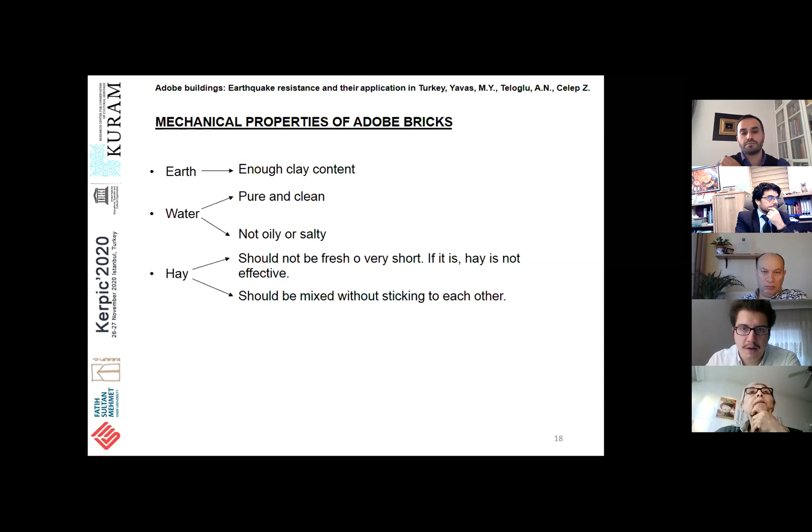Kerpiç tuğlaların mekanik özelliklerine gelecek olursak, kerpiçin içinde toprak, su ve saman bulunmaktadır. Toprağın yeterli kil miktarının olması gerekmektedir. Suyun ise temiz, tuzsuz ve yağsız olması gerekmektedir. Samansa ne çok taze ne de çok kısa olmalıdır. En etkili olduğu an kısa ve üzerinden belli bir zaman geçmiş olan samandır. Aynı zamanda samanın ayrılarak karışımın içine koyulması gerekmektedir.

Su miktarı arttırılırsa çok iyi bir kıvam elde edilir kerpiç harcında, fakat bu istenmeyen çatlaklara sebebiyet verir. Çok az su miktarı ise kerpiç harcının istenilen şekle getirilmemesine sebep olur.

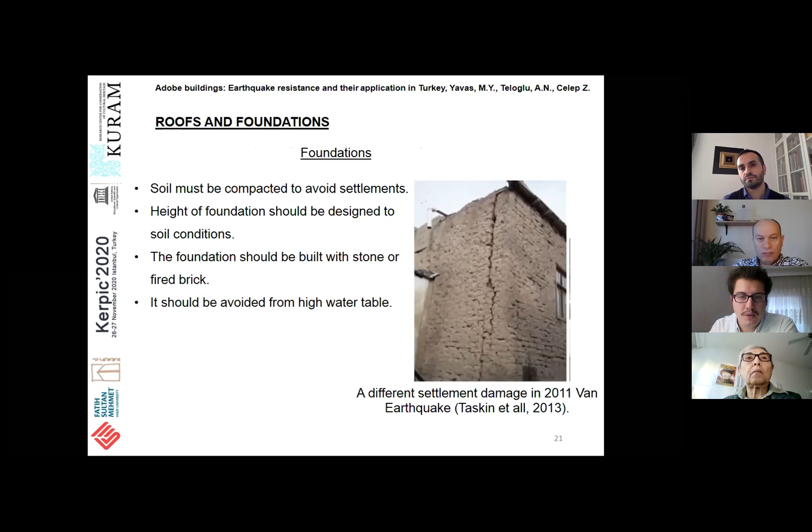Kerpiç binalardaki temellere bakacak olursak, oturmalardan kaçınılmalıdır kerpiç binalarda. O sebeple sıkılaştırılmış zemin kullanılmalıdır. Kerpiç binalardaki temel yüksekliği zemin koşuluna bağlı olarak seçilmelidir. Temel taştan veya pişirilmiş tuğladan yapılmalıdır. Yüksek su seviyesinden kaçınılmalıdır. Çatılara bakacak olursak, çatılarda uniform yani düzgün yayılı bir yük dağılımı olmalıdır. Çatı malzemesi ahşap, makas veyahut betonarme döşeme olmalıdır. Türkiye'deki en büyük deprem hasarları çatılardaki hasarlardan meydana gelir. Bunun sebebi de daha önce bahsettiğimiz gibi çatılarda kullanılan çok büyük kütükler ve aynı zamanda çatının binayla bağlantısının olmamasından kaynaklı hasarlar meydana gelir.

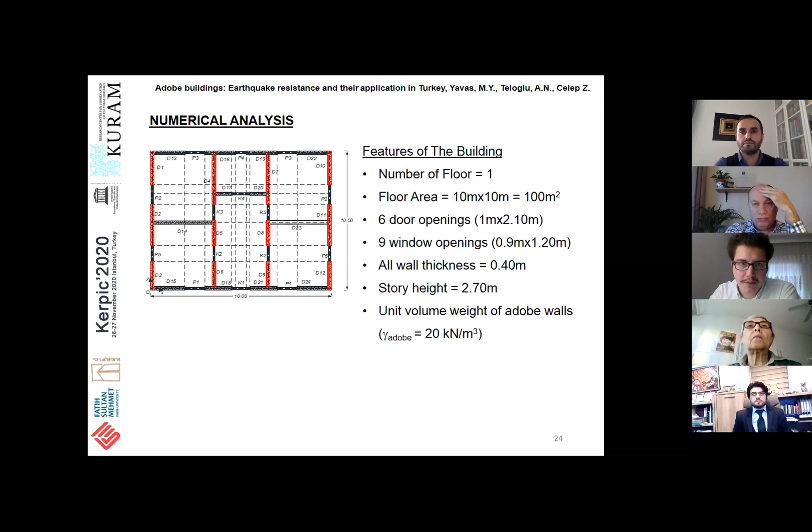Kerpiç bir binada basit bir deprem güvenliğini incelemek istersek, simetrik 10 metreye 10 metre, toplam taban alanı 100 metrekare olan tek katlı bir bina kabul ettik. Bu binada 6 tane kapı açıklığı, 9 tane de pencere açıklığı bulunsun. Boyutları görüldüğü gibidir. Bütün duvar kalınlıkları 0.40 metre alındı. Kat yüksekliği ise 2.70 metre. Kerpiç duvarlarının birim hacim ağırlığı da 20 kN/m3 olarak alındı. Burada tabii bu değerlerin hepsi yönetmeliklerdeki ve çalışmalardan alınmış yaklaşık değerlerdir.

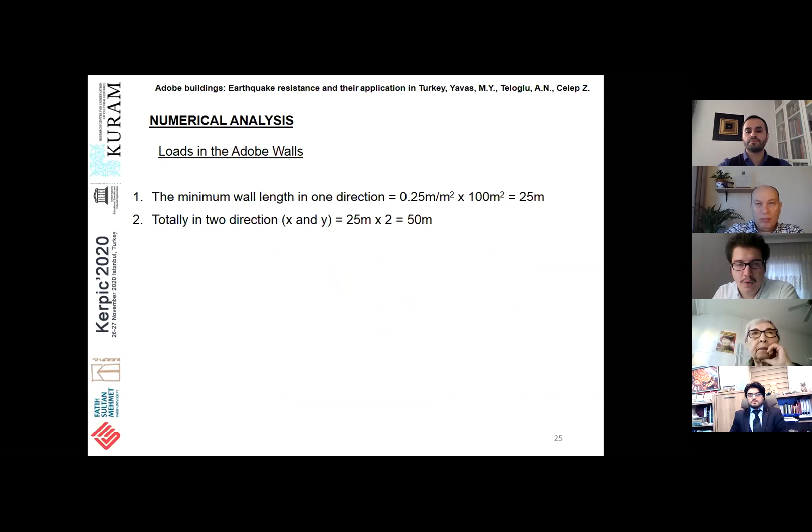1998 deprem yönetmeliğinde şöyle bir madde var: pencere ve kapı açıklıkları haricinde tek bir yöndeki duvar uzunluğunun bina taban alanına bölünmesinin minimum değeri 0.25 metre bölü metrekare olmalıdır. Bu kural kullanılarak tek bir yöndeki duvar uzunlukları, binanın taban alanına çarpıldığı zaman 25 metre olarak bulunur. İki yöndeki hem X hem de Y'deki toplam duvar uzunluğu ise 50 metre olarak bulunur. Tabii buna pencere ve kapı açıklığı dahil değildir. Toplam duvar alanları ise duvar kalınlığı ile çarparak 20 metrekare olarak bulunabilir. Kapı ve pencere açıklıkları ise sayıları ve uzunlukları çarpılarak bulunabilir, o da 21.60 metre olarak bulunmuştur. Duvar uzunlukları ve açıklık, kapı ve pencere açıklıklarının uzunlukları toplanırsa toplamda 71.60 metre bir uzunluk elde edildi.

Sonuç olarak duvarlardaki düşey yükler şu şekilde hesaplanabilir: toplam uzunluklar çarpı kat yüksekliği eksi kapılardaki kapı sayısı çarpı kapının alanı eksi pencere sayısı çarpı pencerenin alanı, çarpı 0.40 metre duvar kalınlığı, çarpı 20 kN/m3 kerpiçin birim hacim ağırlığı. Toplamda duvarlardaki yükler 1368 kN olarak bulunmuştur.

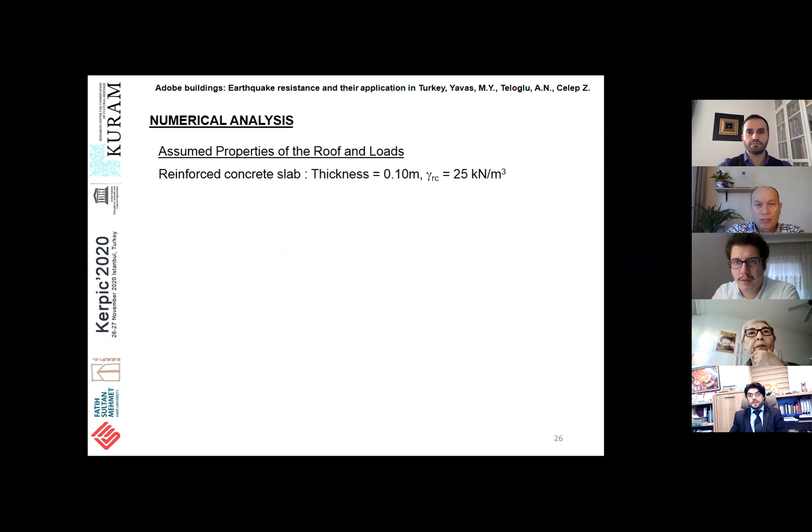Biz bu binaya aynı zamanda bir çatı yapmak istediğimiz zaman betonarme plaktan bir çatı düşündük. Bu betonarme plağın kalınlığı 0.10 metre ve birim hacim ağırlığı 25 kN/m3 olsun diye düşündük. Termal izolasyonu sağlaması için bir kil tabaka olabilir, onun da kalınlığı 0.15 metre ve birim hacim ağırlığı 20 kN/m3 olarak düşünüldü. Kaplama yükü bir çatıda düşünüldü ve bu da 1 kN/m2 olarak alındı. Bina planıyla çatı planı aynı düşünülerek çatının alanı da 100 metrekare olarak alındı. Sonucunda çatıdaki yükler de 0.10 metre çarpı 25 betonarme plaktan gelen, 0.15 çarpı 20 kil tabakadan gelen ve 1 kN/m2'de ek yük olarak düşünüldü. Bu çatı alanı ile çarpıldığı zaman çatı yükü 650 kN olarak bulunmuş oldu. Toplam bina yükü ise duvarların yüküyle çatı yükünün toplamından 2018 kN olarak alındı.

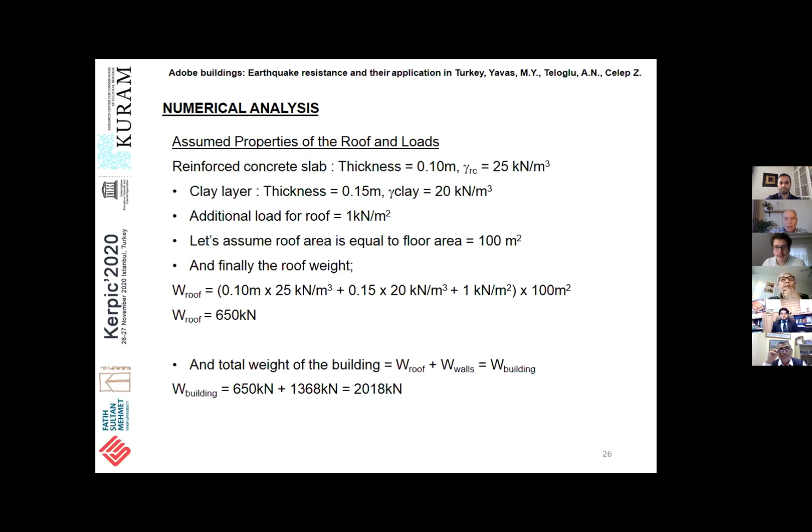Binaya gelen deprem kuvvetini bulmak istersek Türkiye Bina Deprem Yönetmeliğinde verilen spektrum kullanıldı. Binamız hem kerpiç hem de tek katlı olduğu için çok küçük bir periyoda sahip. O sebeple Türkiye Bina Deprem Yönetmeliğinde spektrumda birinci bölgededir, o da 0.4 SDS ile SDS arasında bir ivme değerine sahiptir. Eğer SDS 1.22 kabul edilirse bu bölgede yatay elastik ivme değeri de G kadardır. Deprem yükü azaltma katsayısı seçilmemiştir ve R eşittir 1 olarak hesaba devam edilmiştir. Binaya gelen yatay deprem kuvveti, bina yükü çarpı ivme bölü deprem yükü azaltma katsayısından bina ağırlığına eşit çıkmıştır, o da 2018 kilonewton'dur. Tabii bu deprem yükünden ve düşey yükten dolayı oluşan gerilmelere bakalım.

Güvenle taşıyabilecek binadaki basınç gerilmesi 1 ve kayma gerilmesi 0.15 N/mm² alınmıştır. Kayma gerilmesi çekme gerilmesiyle birbirine eşit olarak alınmıştır binada, yaklaşık olarak tabii ki. Düşey yüklerden dolayı oluşan gerilmeler şu şekilde bulunur: binaya gelen düşey yük olan bina ağırlığı bölü duvarların alanı, iki yöndeki duvarlar alınmıştır. Burada 0.40 metre bina duvar kalınlığı çarpı 25 çarpı 2'de duvarların uzunluğu şeklinde, buradan 0.10 N/mm² bulunmuştur. Bunun birden küçük olduğu görülmektedir. Düşey yüklere karşı dayanıklı diyebiliriz binamız için.

So yeah, we have high-rise masonry buildings in Istanbul and in some other parts of Turkey, as well as many mosques and minarets. So it's a common type of structure in Turkey. The problem is we have a large variety of materials, sometimes good, sometimes bad. Sometimes non-structural bricks are used as structural members, which end up with collapse or heavy damages during earthquakes, which of course makes people approach this kind of construction more carefully.

So until 2018, we had only the allowable stress design method in Turkish seismic design codes. When we modified the code, the 2007 code, ultimate strength design was one of the main revisions on the masonry part. Based on UDSEP, the planning of the state about earthquake resistance overall the country, we were recommended to follow European codes basically - Eurocode 6 and Eurocode 8, masonry and seismic design parts of Eurocodes, were the basis of the revisions. Of course, these codes will be revised in future, so probably we will adapt to these changes as well.

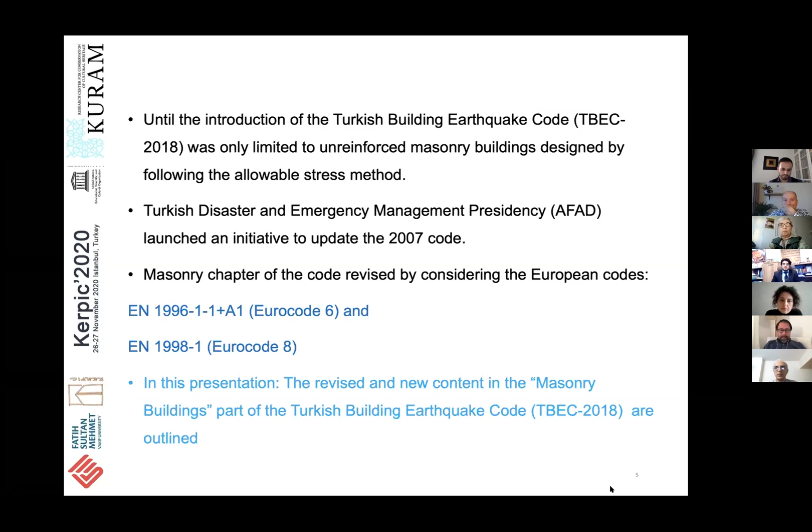So what's new in Turkish Building Earthquake Code 2018? Basically, as I mentioned, we are now using the ultimate strength method, which is a big change for masonry design. Equally important, there are new masonry types on top of unreinforced masonry, which was the only covered masonry type in the previous code. Now we have confined masonry, reinforced masonry, and also reinforced panel buildings. While confined masonry and reinforced masonry are common in many parts of the world, reinforced panel AAC buildings - this is lightweight concrete buildings - is, as far as I know, the first time codified, and that's codified in Turkey through research with a combination of different universities and relevant associations. I will show some of those, and I believe I have many slides, but probably I will only be able to introduce these different types of new masonry systems to the audience because of lack of time, and because I could not make a good organization of the presentation - sorry for that.

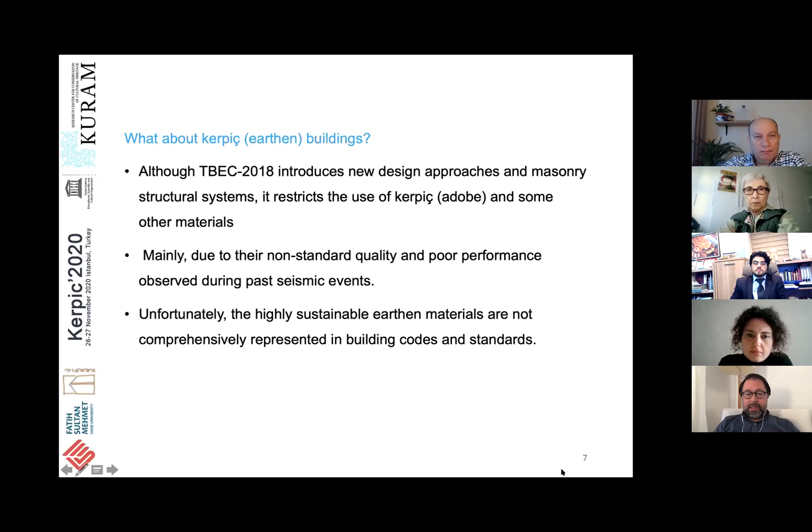So unfortunately, as I mentioned, although there are new design approaches and new masonry types, the code had to restrict use of Adobe and some other materials due to the non-standard material quality and also the workmanship and the resulting poor performance during previous earthquakes, not only in Turkey but also other countries. Of course, we have good examples too, but the non-standard quality made these kind of restrictions valid in the new code. So we hope to do more research - we have to improve, as the previous speaker mentioned, the seismic performance of earthen materials and structures so that we can somehow make them behave better during earthquakes.

Unreinforced buildings have well-known rules in the seismic design code, so I won't spend time on that. Instead, let's discuss confined masonry buildings, which are relatively new in terms of Turkish seismic design codes.

Actually, we already had such structures. The structure on the right is a kind of confined masonry. We have many of these buildings throughout, where first the walls are constructed and then the concrete members, like weak columns and weak beams or tie beams, are constructed afterwards. Now this is codified with construction and detailing rules in Turkish seismic design codes, and we call it kuşatılmış yığma in Turkish, the confined masonry.

Reinforced masonry is an even better application with higher ductility, and the code allows significantly higher buildings to be constructed using this technique.

While doing this, we were always in contact with industry, with the brick industry and others, and we asked about the possibility of producing such members. They were very willing, because masonry construction is getting less common day by day, so they needed new openings, new frontiers. They were very willing to apply these new materials in their production.

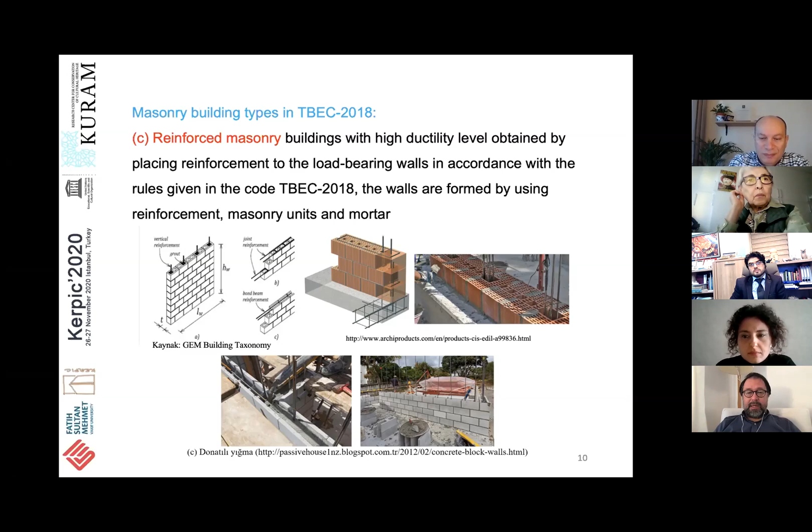This one is new, as I mentioned. While it's used all around the world, including Turkey, it was not codified before. Up to this code, the regulations about how to design and calculate these structures are now included. Basically, we have a reinforced panel like that, used either as walls or slabs.

In between the panels we have reinforcing bars, both in vertical and horizontal directions, connected to the foundation and the tie beams around the structure. You can build 2 or 3 story buildings using this technique, and since it's produced in the factory, the quality is more promising and standard.

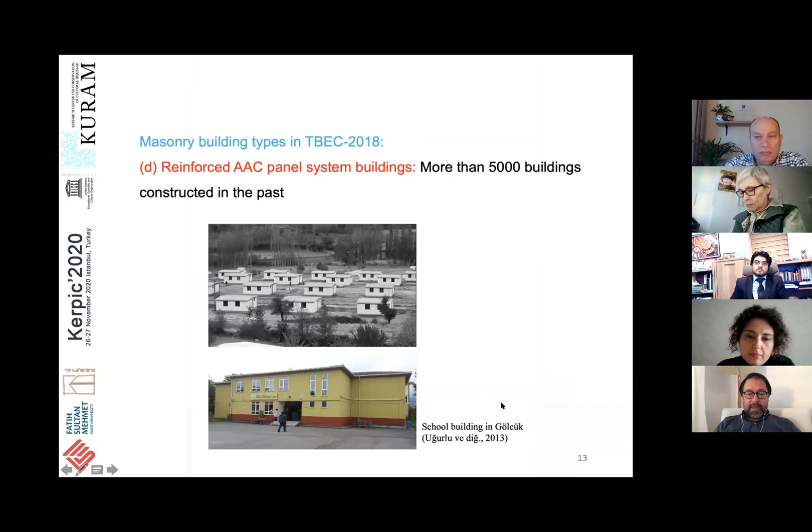More than 5,000 of these buildings have been constructed in the past, mostly right after earthquakes, built rapidly and used as shelter houses. There are also different types of buildings, one of which is in Gölcük. We examined and analyzed it in detail after the earthquake, and it performed well, as demonstrated.

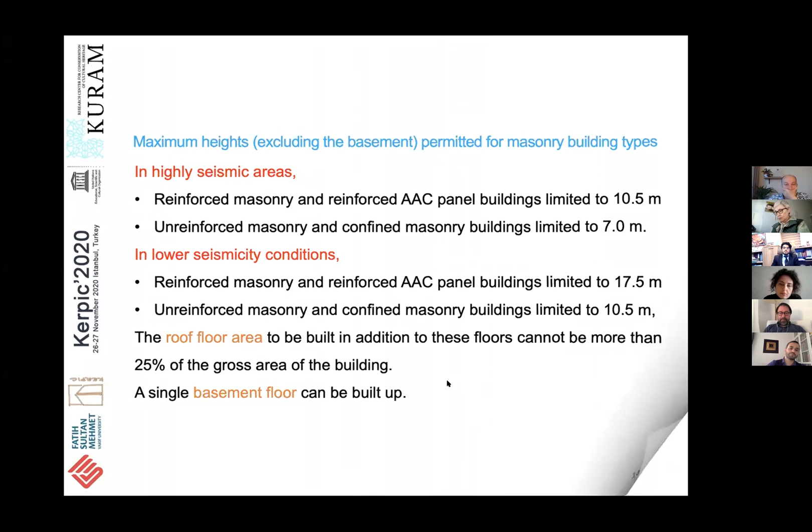Regarding different units, you can use bricks, AAC, natural stone, and artificial stones, but unfortunately some other materials are prohibited in this code. There are different definitions based on type and void ratios, which I won't spend time on, but these affect the material characteristic strengths and design strengths we must account for during design.

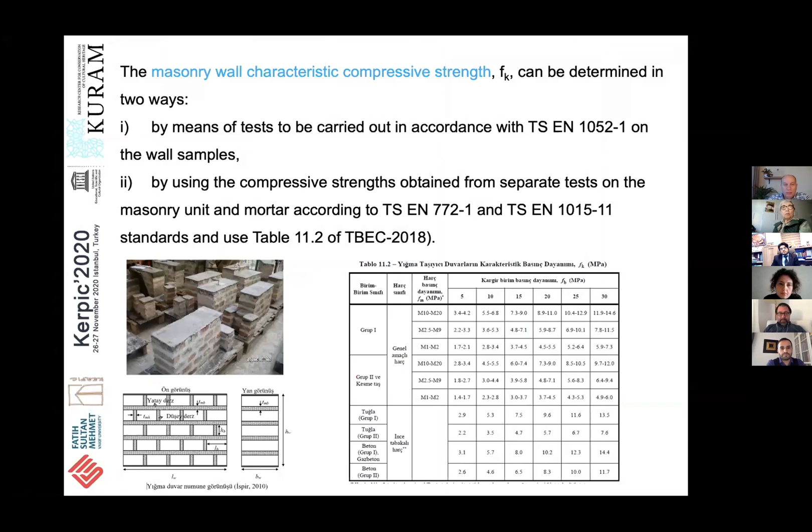I'm passing these slides - if you have any questions I'll try to answer. These show how we determine the characteristics of the materials in compression and in shear.

As the previous speaker mentioned, we now have an ultimate strength design methodology with partial material safety factors, unlike allowable stress methodology. The material factors are: for masonry blocks, it's 2; for steel bars, it's 1.15; and for factory-produced aerated concrete, it's 1.75.

These are given for the elastic modulus as well as the shear modulus of masonry. For structural analysis, we now want to require engineers to model the structure using finite element modeling and analyze it under vertical and horizontal loads rather than simple hand calculations. There was a simplified chapter, but it was removed after discussions from the code. Either finite element analysis or equivalent frame analysis methods are now allowed.

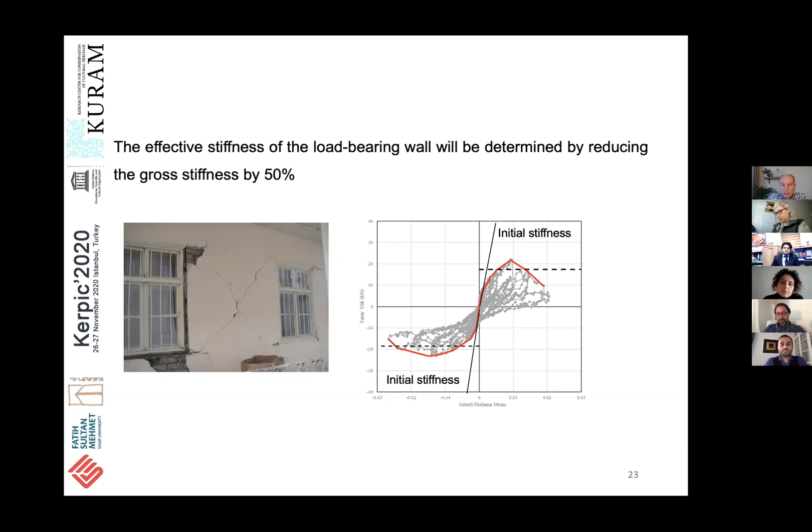Effective stiffness concepts, new for concrete structures, are being used in the 2018 code. This is valid for masonry structures as well, considering the possible cracking during earthquakes.

This is again a new concept for masonry structures. Now we consider ductility with seismic load reduction factors up to 4 for reinforced masonry and reinforced AAC panels, 3 and 2.5 for other types of masonry, as well as for shear and brittle failure mechanisms. We have an overstrength factor which should be taken into account during design.

Drift limits are broad, at 0.7% under seismic loads. Rigid diaphragms should be provided somehow, and this should be proved in the analysis, of course.

That's one of the main problems we experienced after the earthquakes. Many damages occur because of lack of sufficient diaphragm in the structure, so the structure doesn't behave like a box.

About the out-of-plane failure mechanism, no direct regulations are put in the new code, but there are some indirect limitations which will avoid out-of-plane failure mechanisms. The code allows going beyond these limits, provided additional calculations are carried out based on Eurocode.

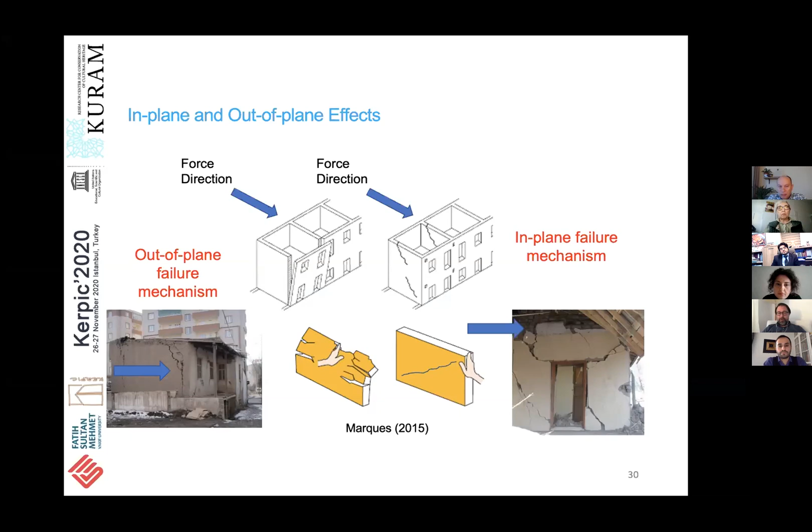But since we have only a limited number of pages, we could not go into much more detail, so I'm passing these because of the time limits.

As I said, the walls are designed like columns or shear walls, considering the reinforcement inside, using basic mechanics of reinforced concrete design. The panels are considered again like reinforced concrete walls, but they are considered separately because during earthquakes they separate from each other.

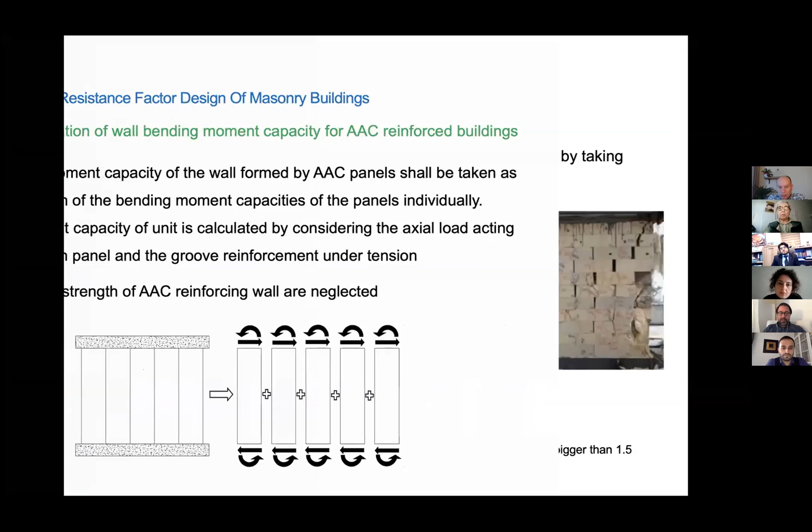Both unreinforced masonry and reinforced masonry structures are designed considering diagonal tension failures, diagonal compression failures, as well as shear slip behavior. All the equations are given, so the walls should satisfy all of those.

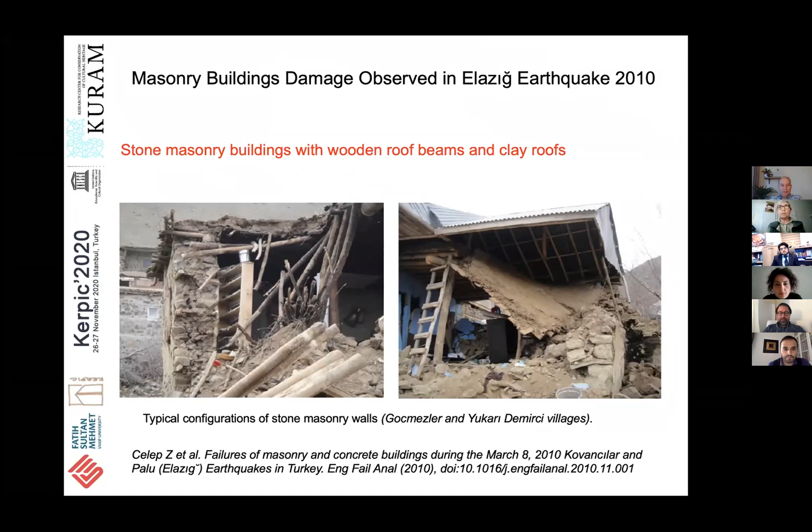With just a minute left, let me summarize some damages experienced during the earthquakes. The diaphragm is one of the main problems. Poor connections of the walls in different directions, as well as connections of different layers of the walls in the transverse direction, are among the main problems.

Out-of-plane failures are also commonly observed. You see, one story was lost here. This is in Elazığ, from the previous earthquake in 2010. One story was lost because they hadn't used proper bricks, and also the walls were poorly constructed.

In Palu, there were a lot of KERPİÇ buildings which performed extremely well, provided that these kinds of wooden tie beams were used in the structure. These are two-story structures, sometimes more, and most of them performed exceptionally well in the Palu earthquake.

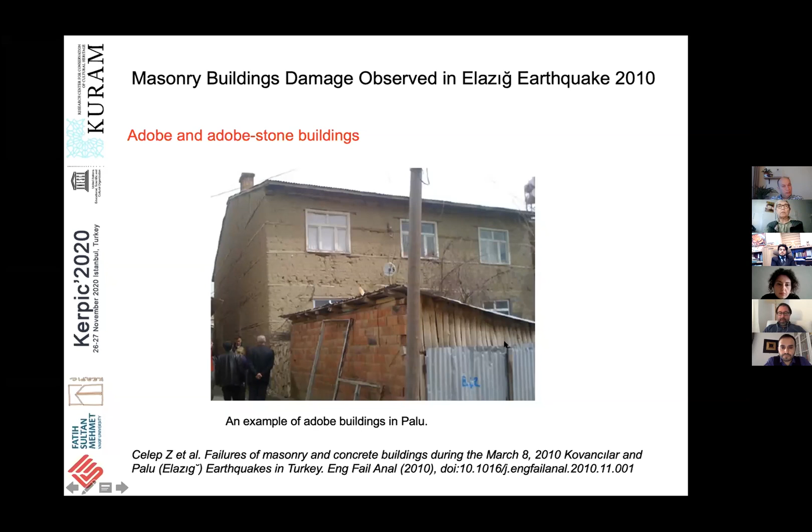I've talked about most of these, so I'm passing these slides to not take much of your time. There are many non-engineered confined masonry buildings all around Turkey.

Finally, there are new methodologies and new types of masonry construction allowed in the Turkish Seismic Design Code, and we hope to improve and apply KERPİÇ more widespread. We have to research better seismic performance of these kinds of structures.

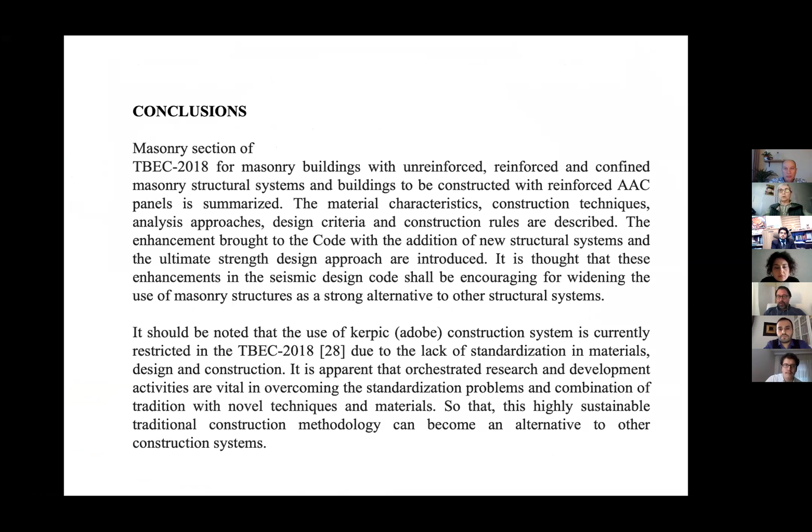My previous colleague made some suggestions. I believe they should be verified with more research, maybe more testing. With that, I complete my presentation, and thanks a lot.

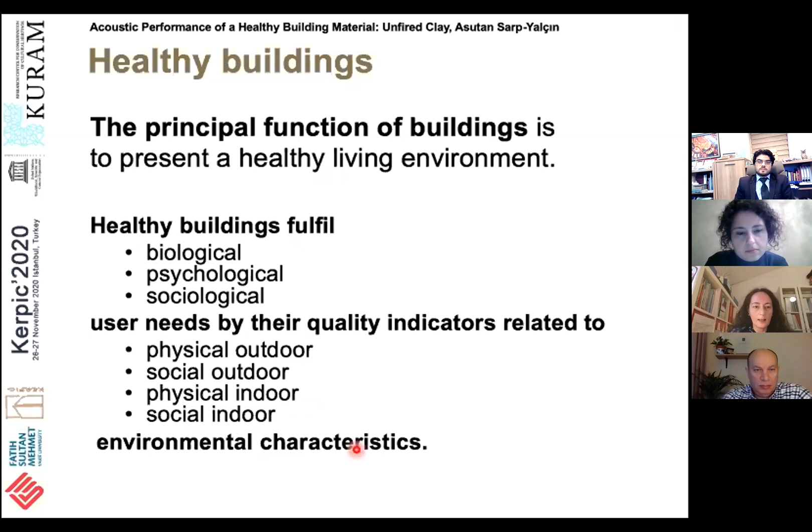The principal function of buildings is to present a healthy living environment by providing desired conditions to meet their users' needs. Healthy buildings fulfill biological, psychological, and sociological user needs through quality indicators related to physical and social, outdoor and indoor environmental characteristics. Physical indoor environmental characteristics can be classified as dimensional, formal, visual, tactile, atmospheric, and auditory characteristics.

Sound is a component of auditory characteristic, and it directly affects the performance, comfort, and health of users. Noise levels are measured in decibels in the range of 140 to 0 decibels, which are the threshold of pain and threshold of hearing. 110 decibels is shout into the ear, 90 for air traffic, 80s for road traffic, 50s for conversation, and 30s for whisper.

Noise causes a wide variety of health problems. Adverse biological effects of noise on human health are hearing loss and sleep disturbance. As a result of noise disturbance and distress, psychological effects may arise as well. In connection with these psychological effects, social influences create negativity in users' relationships with others.

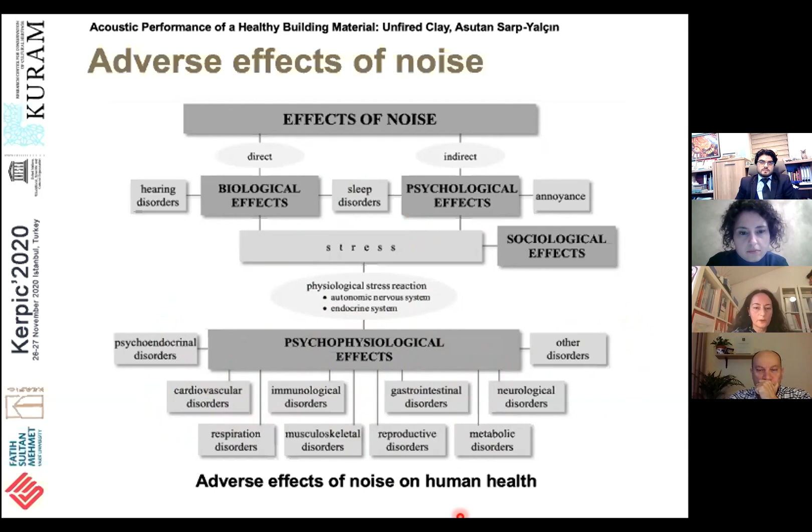So what should architects, what should we do? We should take some precautions to reduce noise levels to acceptable levels. How can we do that? The material selection of building elements is one of the most important issues to be considered during design.

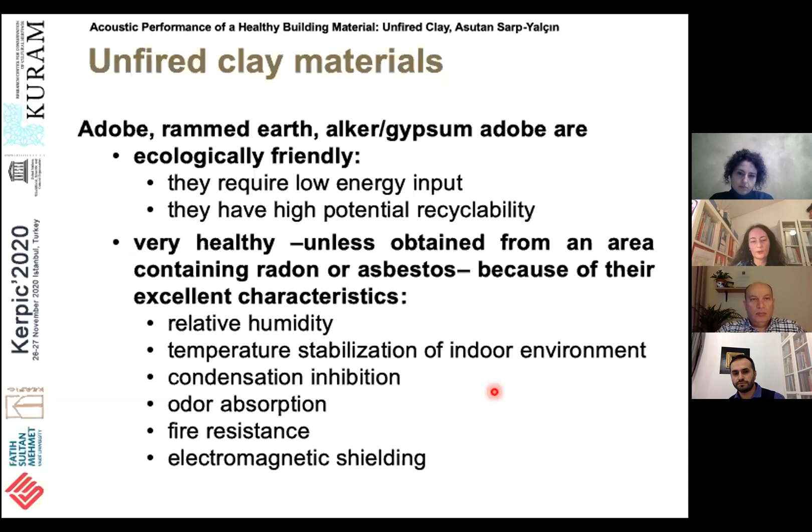Unfired clay materials such as Adobe, rammed earth, and alker are ecologically friendly because they require low energy input and have high potential recyclability. They are very healthy because they have excellent characteristics of relative humidity, temperature stabilization, condensation inhibition, odor absorption, fire resistance, and electromagnetic shielding. But what about noise reduction? The aim of my study is to reveal the acoustic performance within the scope of noise reduction and to find out whether unfired clay materials can provide a healthy indoor environment against noise.

During the evaluation of acoustic performance of unfired materials, transmission and absorption should be taken into account, as sound transmits through building elements, and after transmission it may increase due to reflection.

95% of the sound energy is transmitted by mass vibration. How? At first, sound waves vibrate building elements, then the elements act like sound sources, and they emit sound by creating vibrations on the air of the receiver room.

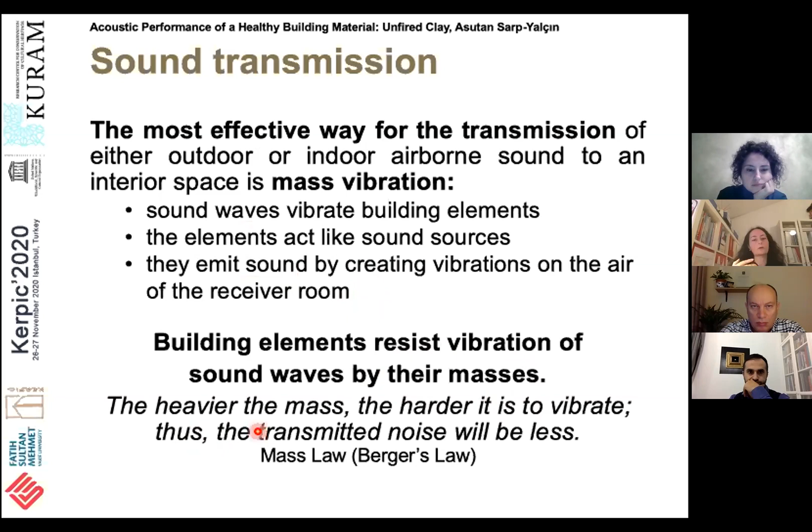Building elements resist vibration by their masses. So the heavier the mass, the harder it is to vibrate. This is called mass law, Berger's mass law.

The mass per unit area of building elements can be calculated by this equation, which multiplies mass per unit volume with the thickness of the material. Here we can see the calculated examples of the masses of external and internal walls produced from several materials.

As we can see, our unfired materials—traditional Adobe incorporated with straw, rammed earth, alker—are heavier when compared with other materials such as fired bricks, concrete, and gypsum, except for stone, of course. They're heavier because they're not hollowed, they have high density, and they are used with thick sections due to their load-bearing feature.

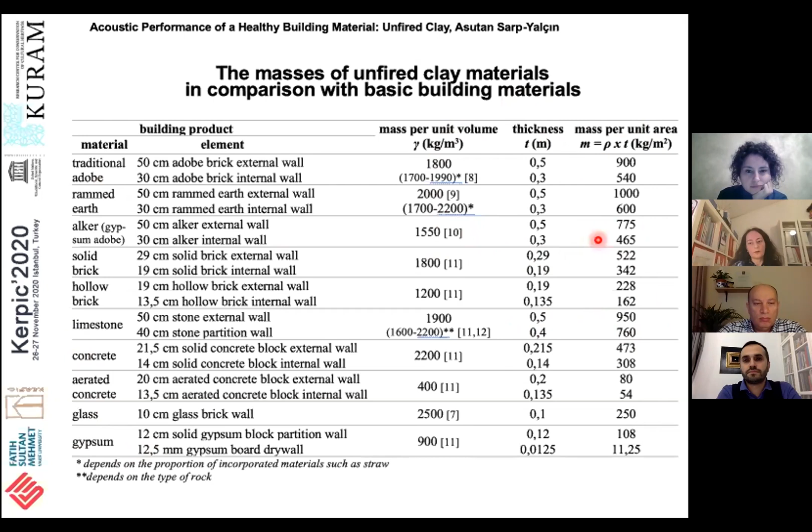Sound transmission loss determines the sound insulation property of building elements, and this STL increases with mass increase. So the heavier the partition, the less sound it transmits to the adjacent space. To reach an acceptable sound level, the increase in mass can be achieved by increasing the thickness or selecting a building material with a high density.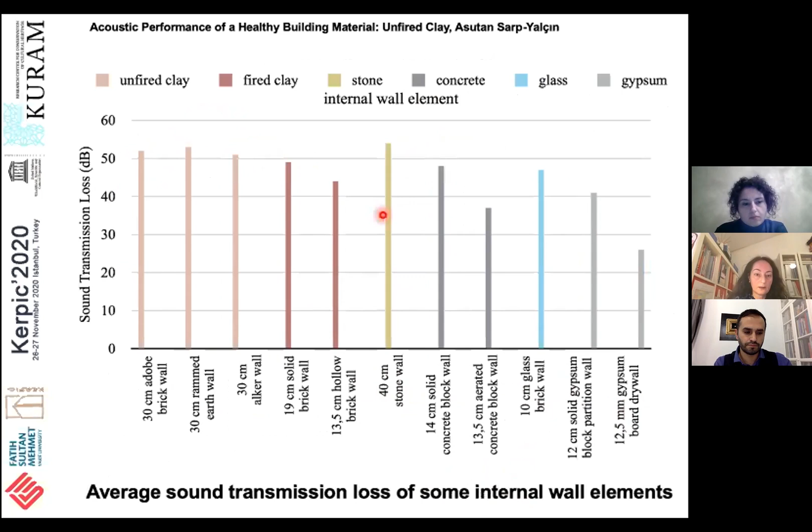Sound transmission varies with frequency, and frequency is the number of sound vibrations occurring in a unit of time. It refers to whether the sound is treble, like a child's voice or a short string sound of an instrument, or bass, like a man's voice or contrabass sound. As the frequency of the sound increases, sound transmission loss increases as well.

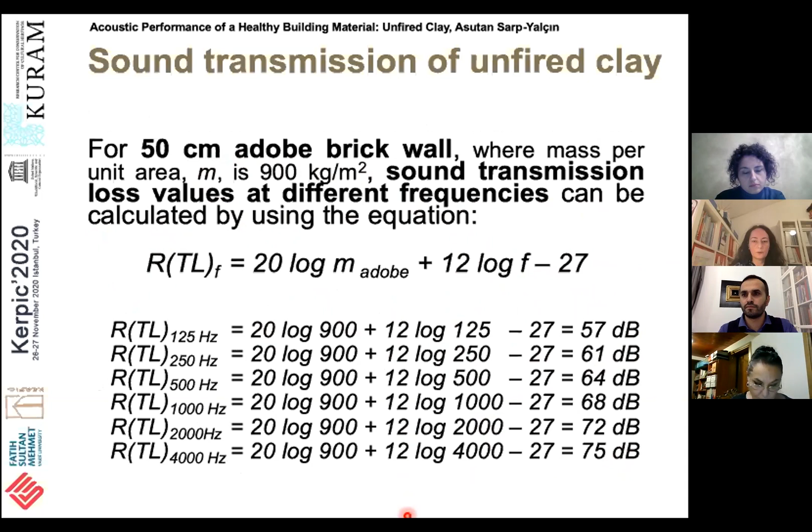We can calculate the sound transmission loss at different frequencies by this equation. For a 50 centimeter Adobe brick wall, I calculated like that, and to compare with other building materials, I applied the same calculation to the external and internal wall elements, as you can see here.

For internal wall elements, the sound transmission loss of stone is the best, followed by unfired clay products. The values of solid fired brick and concrete blocks are close to this group. Hollow brick provides low sound insulation, but still better than aerated concrete and gypsum.

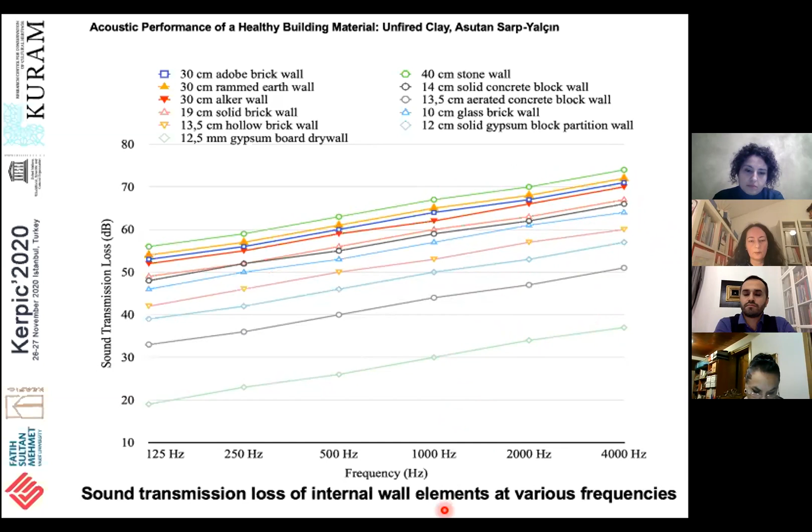At low, mid, or high frequencies, we can distinguish the difference in sound insulation of each building element, and it's easily readable from the figures that building elements have better sound insulation at high frequencies. We can see the 75 here.

I should also note that the linear graphic outcomes from calculations may not be obtained from measurement, because at certain frequencies, lower sound transmission loss than calculated can occur. The reason for this is the decrease in the section's resistance to sound energy because of resonance and coincidence frequencies. So as a precaution, we can design an extra 5 decibel higher sound transmission loss value.

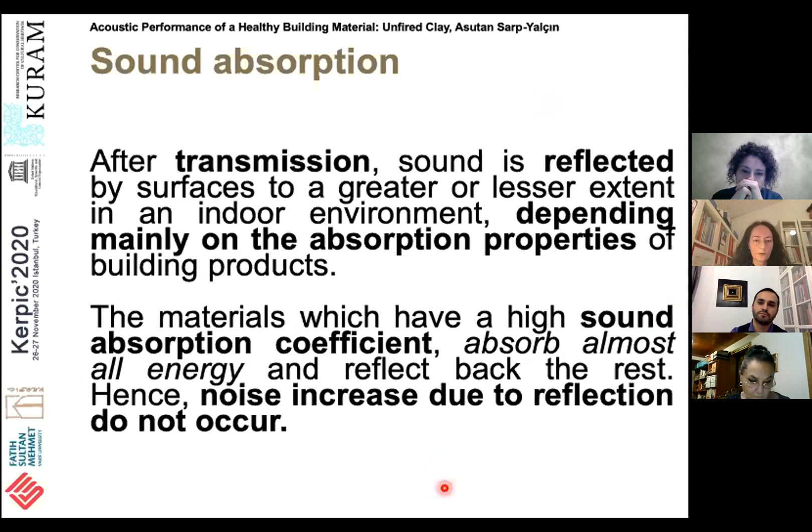When we come to sound absorption, after transmission, sound is reflected by surfaces to a greater or lesser extent. It depends mainly on the absorption properties of building products, and on the sound absorption coefficient. This absorption is related to the porosity of the materials. So light materials with fibrous or open surfaces are good absorbers, but smooth hard surfaces are highly reflective to sound.

We should take additional precautions for it, such as decreasing the density by adding low dense materials into the clay mixture, such as basaltic pumice, or placing acoustic resonators within suitable locations, or laying bricks with gaps where load-bearing feature is not required. But we shouldn't forget that direct intervention to the unfired clay wall to improve sound absorption behavior will negatively affect the sound transmission loss, in other words, insulation properties.

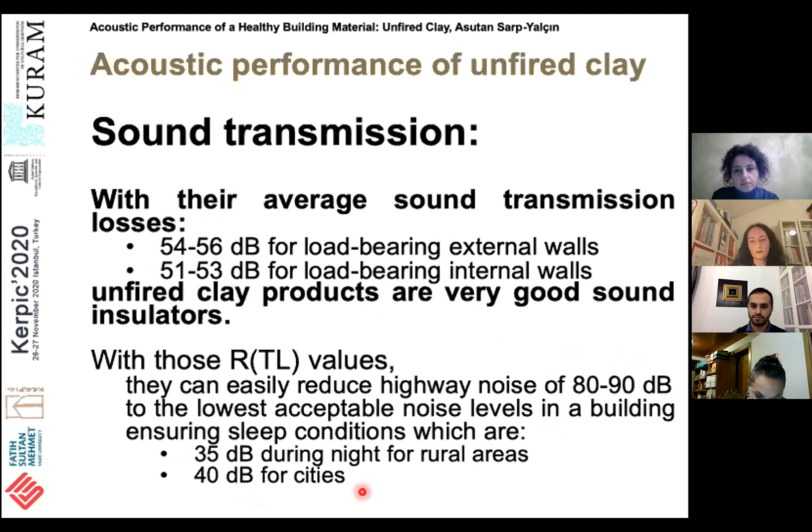For sound absorption, we should take precautions. It will be more appropriate to take precautions on the wall surface rather than its physical structure, as changing the physical structure will negatively affect the sound transmission loss properties.

So, in addition to its many excellent characteristics of environmental and health, unfired clay is a high performance material in terms of noise reduction, and the usage of this material in contemporary architecture will contribute to prevent noise-induced health problems before they occur, and fulfill the basic requirement of users to lead a healthy life in a healthy building.

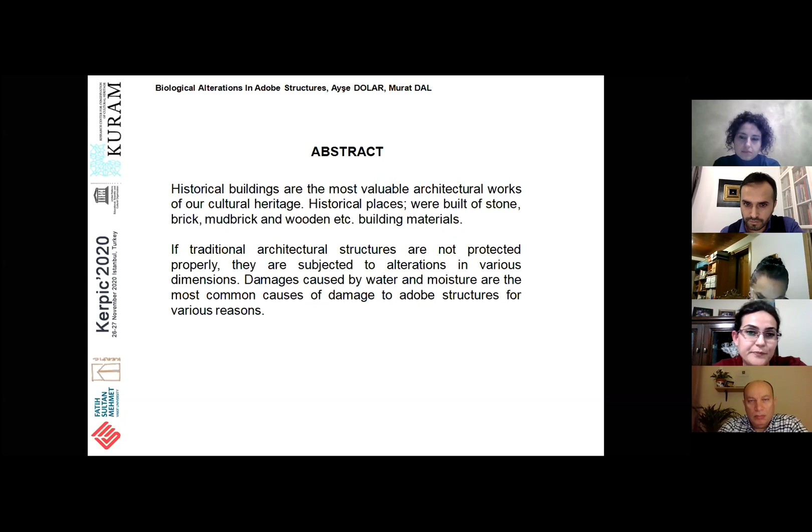The difference of historical buildings from modern buildings is that they are closer to the ground. Built with more porous materials, they collect water from the ground, carry it along their structure, and evacuate it by evaporation, creating side effects such as oxidation and crumbling.

Walls and floors are the point of change for these reactions. Increased soil moisture and a variable climate can lead to greater circulation of dissolved salts and hence damage by crystallization on decorated surfaces, and also greater soil imbalance.

Humans built their houses and monuments using soil in order to survive in the early days of civilization, when natural building materials such as stone and timber were not available. Sumerians, Assyrians, Egyptians, and Hittites have used Adobe materials in house constructions and monumental structures such as stables, palaces, castles, walls, and towers since prehistoric times.

What are the basic steps of brick making? The first one is clearing a large open space for the bricks to be dried. Second, finding and digging up appropriate sediment. Third, mixing the sediment with water and tempering material. Fourth, putting the mud into wooden molds and scraping off the excess. Fifth, after a batch of bricks is made, leaving them to dry for about a week, turning them on alternate sides.

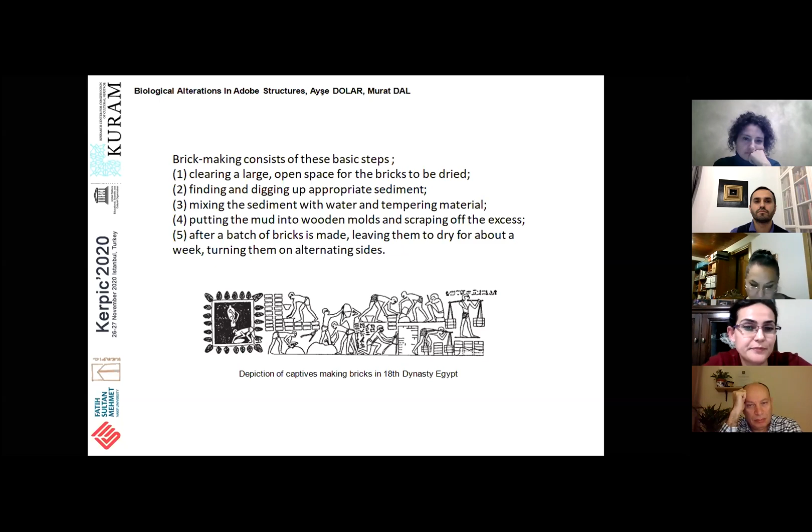Vaults could be laid using the same bricks as were employed in the construction of walls, or could be created with bricks made specifically for the job. In the latter case, the bricks are thinner and lighter, and could even be wedge-shaped rather than rectangular to facilitate the shaping of the vault. Specialized vaulting bricks often were scored with finger marks when they were produced, a feature that increased the bonding of mortar to the bricks during construction.

The history of mud brick buildings dates back to about 9,000 years ago. Adobe is widely used as a building material in many developing countries because of its low cost. Its use is more common, especially in towns with poor people. Mud brick is a building material obtained by mixing appropriate clay soil with straw, other vegetable fibers, or some additives, kneading the mixture with water, shaping it by pouring into molds, and drying under atmospheric weather conditions.

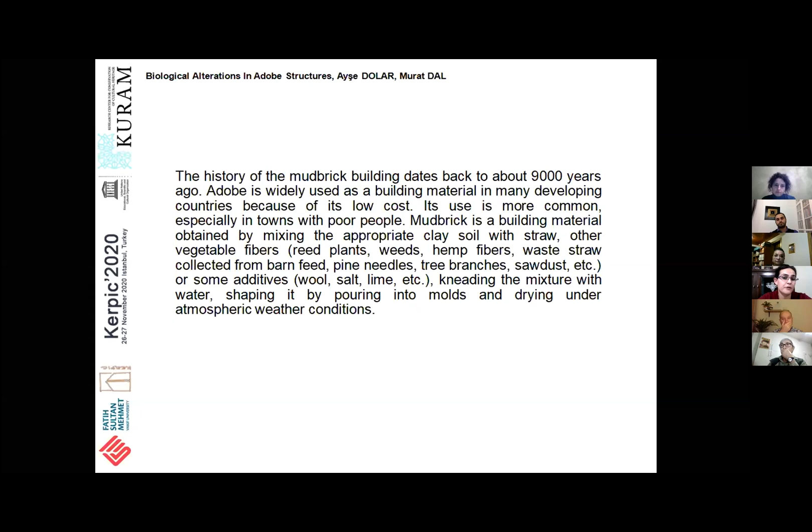Historic houses and monuments made of earth are very difficult to protect. Mud brick structures are among the raised structures that are adversely affected by weather conditions such as rain, snow, and wind. In time, degradation occurs in Adobe structures due to three main reasons: physical, chemical, and biological. The most important source of degradation of the Adobe structure is water and moisture.

Physical degradation: the Adobe structure is damaged by pulling up the rain and snow water accumulated on the floors by capillary means. Soluble salts found in high amounts in the soil used in the production of Adobe materials cause the Adobe structure to crumble and deteriorate with the effects of water and moisture.

Chemical degradation: rainwater entering the wall with the effect of wind and spreading with capillarity also starts to dissolve different amounts of salts in the artificial or natural materials on the wall. Dissolved salts create erosion on the surface, destroying the surface protection and also causing appearance defects.

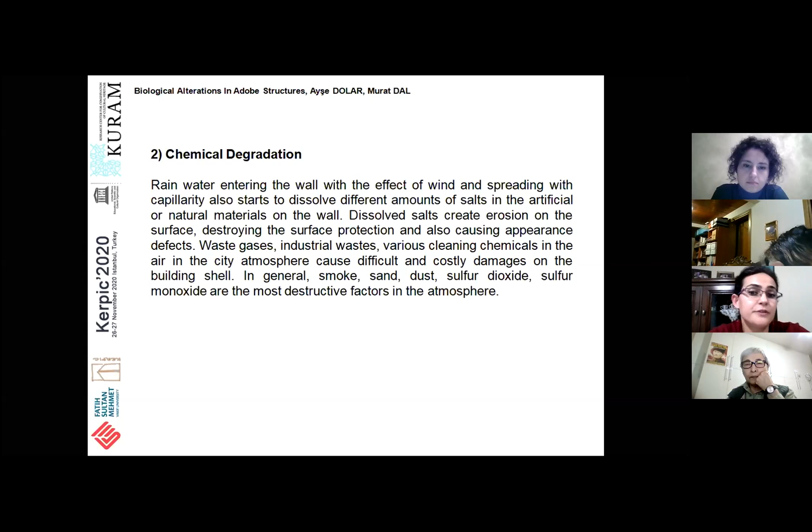Waste gases, industrial wastes, and various cleaning chemicals in the air in the city atmosphere cause difficult and costly damages on the building shell. In general, smoke, sand, dust, sulfur dioxide, and sulfur monoxide are the most destructive factors in the atmosphere.

Biological degradation: the straw and other plants used to make Adobe are a food source for ants and other creatures. Reptiles, rodents, insects, bacteria, fungi, and plant species living in the soil environment play an active role in the deterioration of Adobe structures. For example, life forms fed by the roots of mud brick plants open channels to reach the roots of these plants, causing the Adobe to weaken, fragment, and corrode.

Flowering can also be seen when seeds come naturally between the fine capillary cracks formed over time in the Adobe structure.

Biodegradation depends on environmental factors such as colonization of bacteria, lichens, moss, fungi and algae, humidity, light intensity, air pollution, climatic conditions, porosity and mineral components, and biological receptivity of the substrate.

What are the effects of climate change on buildings? Climate change is the most realistic threat to historical heritage in the world. Most current research on climate change effects focuses primarily on agriculture, biodiversity, health, and water research. The consequences of climate factors on built cultural heritage are multifaceted and difficult to assess, due to the complexity of behavior patterns of building materials in historic buildings.

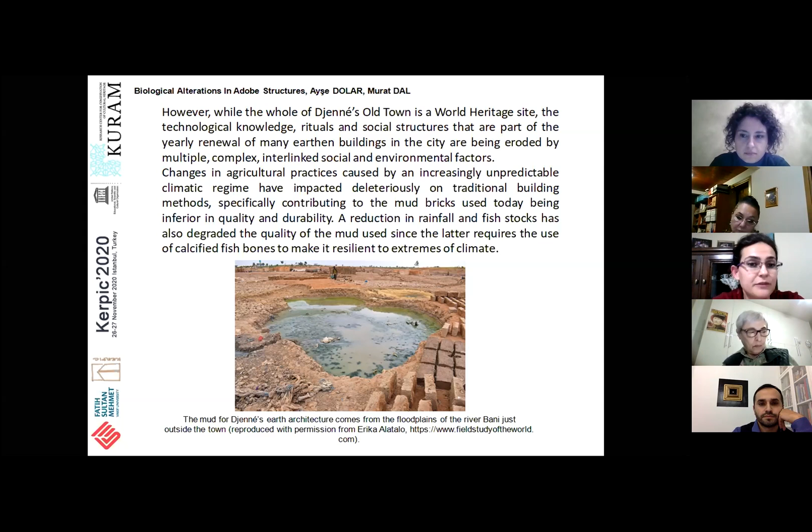Changes in agricultural practices caused by the increasingly unpredictable climatic regime have impacted deleteriously on traditional building methods, specifically contributing to the mud bricks used today being inferior in quality and durability. A reduction in rainfall and fish stocks has also degraded the quality of the mud used, since the latter requires the use of calcified fish bones to make it resilient to extremes of climate.

Arguably, one of the most iconic forms of African heritage at risk from climate change is traditional adobe architecture, including the technology to build it. Although temperature differentials and erratic precipitation regimes have a direct impact on adobe buildings, other multiple interlinked and often indirect factors mediated by a changing climate are already undermining traditional adobe building methods. Building in adobe is nevertheless one of the most sustainable forms of architecture in Africa, as seen in the picture.

The water moisture destructions of the adobe structure: water brings dirt and pollutant particles trapped or adhered to the facade material, parapets or protrusions. Flaking, abrasion, part rupture, and detail loss occur on building materials due to the effect of water and moisture.

The water rising from the ground causes the outer surface plaster to fall off, the physical and chemical structure of the walls to deteriorate as a result of the evaporation of the salts it carries on the facade surface.

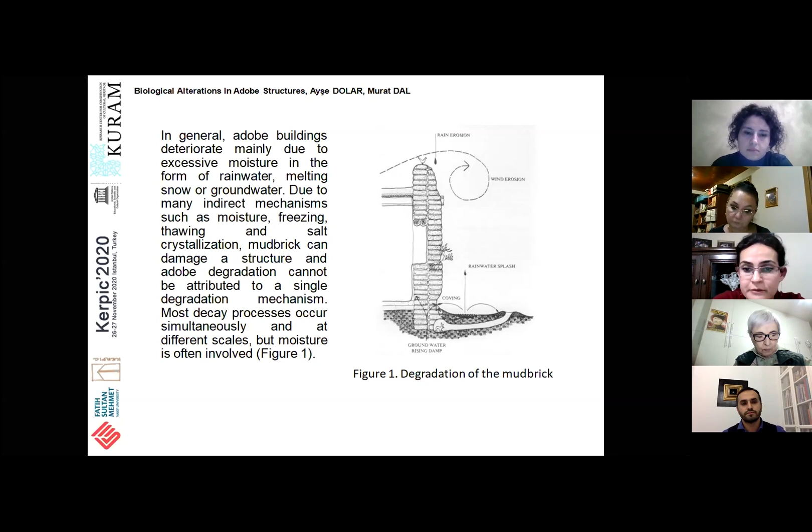Rainwater falling on the facades with the effects of wind causes moisture on the interior facades by entering through the cracks or gaps in the building materials. Water coming to the wall surface causes the facades to get wet. This shortens the life of the building over time.

Moisture damages the material of the building, property, and people. It causes metal materials to rust and corrode. It causes wood material to crack, rot, and swell. It causes exfoliation in capillary materials due to freezing, and blooming in plasters. Since humid air is conductive, heat and sound transmission increases. It causes rheumatism and joint pain in humans.

Biological degradation in adobe structures. Not only moss or lichens, but also fungi, lichen, bacteria, and higher plants develop in adobe structures with the increase of moisture. Germination is seen common in rainy regions. In more arid climates, a few leaves of xerophytes on the surface can be supplemented with large roots several feet tall, causing massive cracks in the wall in search of water. Once rotted, they leave holes for water infiltration primarily.

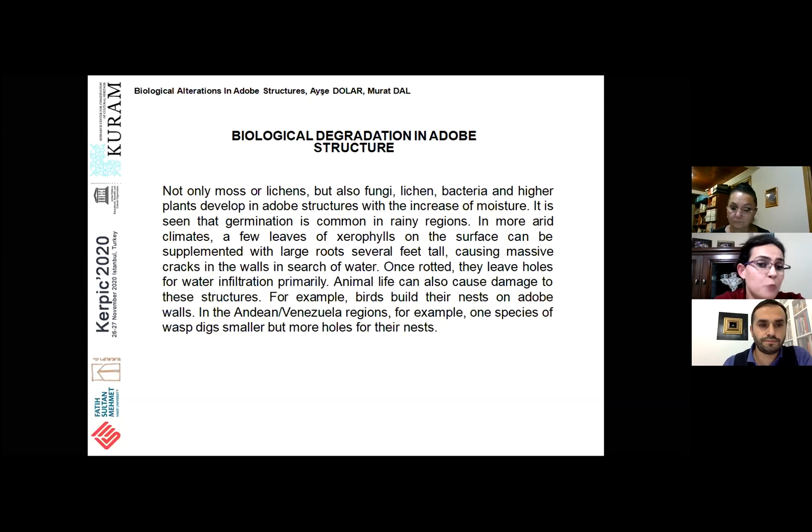Animal life can also cause damage to these structures. For example, birds build their nests on adobe walls. In the Andean Venezuela regions, for example, one species of wasp digs smaller but more numerous holes for their nests.

The weight of the material lost from the wall due to biological degradation was estimated to be 729 kilograms of soil, and the destruction in the parts exposed to the invasion reduced the thickness of the mud brick wall by about 7 centimeters compared to parts without bee nests.

It has been observed that the nest cells are generally vertical or slightly inclined toward the wall, up to 12 centimeters from the wall, as you see in figure 4. This study emphasized that adobe walls are not only damaged by weather conditions but also exposed to biological degradation.

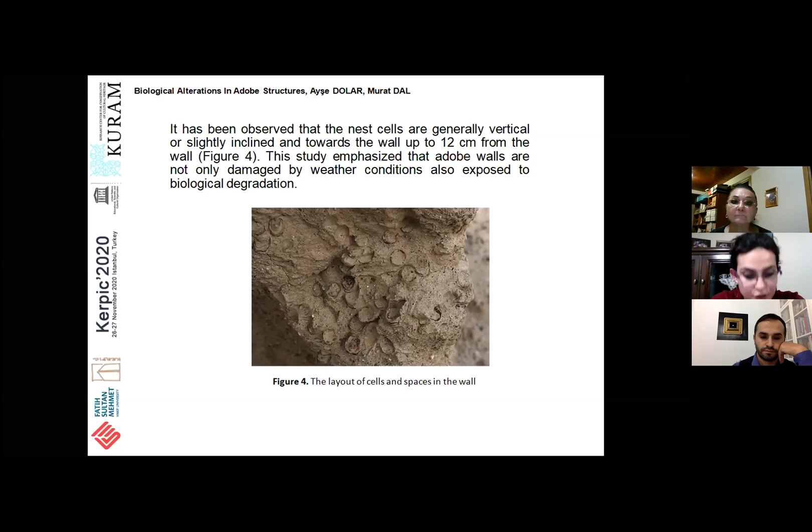In another study in Brazil, the presence of fungal communities in biofilms growing on the earthen walls of rural and semi-urban historic buildings in the upper basin of the Paraíba do Sul River have been described. Significantly high fungal biodiversity has been found in compacted soil. Fungal biological degradation is one of the most important degradation mechanisms, effective in increasing loss of aesthetic and functional properties of building materials on both organic and inorganic substrates.

In this sample, 16 fungal isolates were identified as a result of the study.

Conclusions and discussions. As a result of the research, the first studies of biological degradation in adobe structures made an important contribution to the broader understanding of such a phenomenon in the context of cultural heritage.

The fungal colonization detected exhibits both acidifying and cellulolytic activity, albeit to a different extent, leading to a potential risk of damage. It compromises the mechanical stability of soil structures by growing inside them, feeding on organic binders and fibers, and releasing aggressive metabolic byproducts.

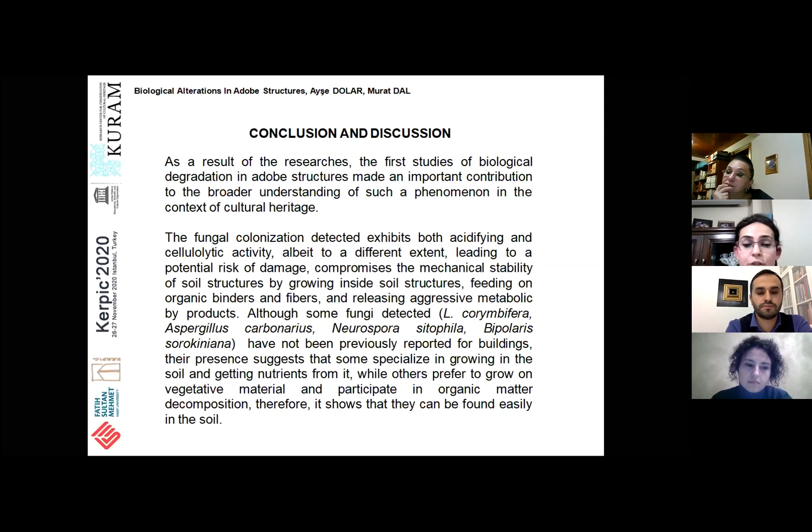Also, some fungi detected have not been previously reported for buildings. Their presence suggests that some specialize in growing in the soil and getting nutrients from it, while others prefer to grow on vegetative material and participate in organic matter decomposition. Therefore, it shows that they can be found easily in the soil.

For the walls of Kapayan ruins to become the preferred nesting habitat for Centris muralis, there are likely two main factors: the availability of food close to the nest, and the large homogeneous surface area where the structure creates a habitat as attractive for nesting.

Inside the nest, abundant pollen was found from Larrea cuneifolia and Larrea divaricata, indicating that these plants provide the main source of wild flowers that bees can feed on.

The corrosive effect of Centris muralis is thought to be bidirectional. Insects actively extract material from the mud brick structure while digging deep hollows to build nests, and the voids weaken the mud brick structure, with some parts collapsing as a result.

Biodegradation of the mud brick wall caused by muralis is not abrupt. Its harmful effect is a long process seen in high-density spaces. Due to the abandoned state of these ruins, the structure and strength of the buildings have deteriorated.

It will be more possible to prevent this biological degradation process with minimum maintenance, by blocking the holes created by the bees in the adobe structure and using natural or artificial repellents and deterrents. However, when the presence of a significant number of cells threatens the stability of the entire wall, removing the nests and clearing the affected area will work better to perform consolidation tasks.

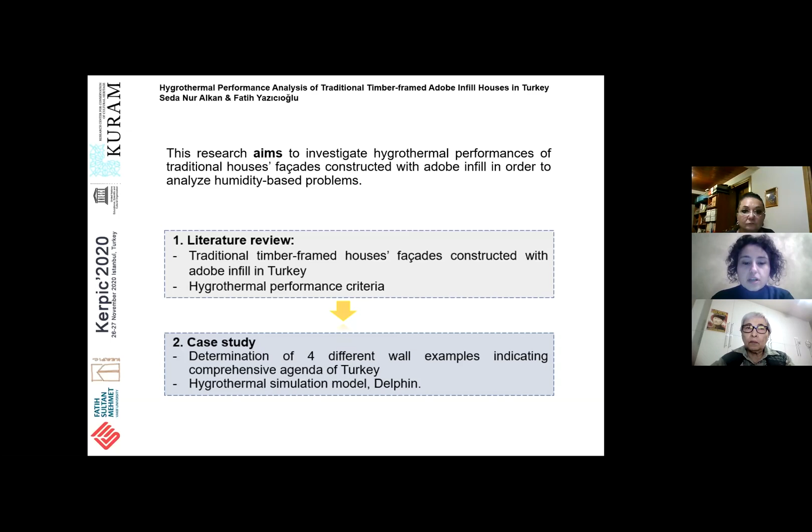As we all know, Turkey has a comprehensive agenda of traditional timber frame houses and they reflect cultural, historical, architectural and social features. During the historical period, since the establishment of the Turkish Republic in 1923, the materials and methods of construction have transformed into a new approach because of urbanization effects in Turkey, and we see so many apartment buildings that dominate the urban areas and city centers.

It's thought that concrete is a very similar and simple way of design to supply energy and cost efficiency during the design and construction processes. As a result of this process, we see that traditional timber frame houses become cultural heritage parts in terms of being elements of the city center.

At the beginning of the 21st century, sustainability became a really important issue, and in terms of this, timber frame houses have become crucial because of their environmentally friendly behavior. In Turkey, besides this sustainability issue, after the earthquake in 1999, in some cases we see these buildings perform well under seismic loads compared to concrete frame buildings, and there are many studies about this issue in the literature.

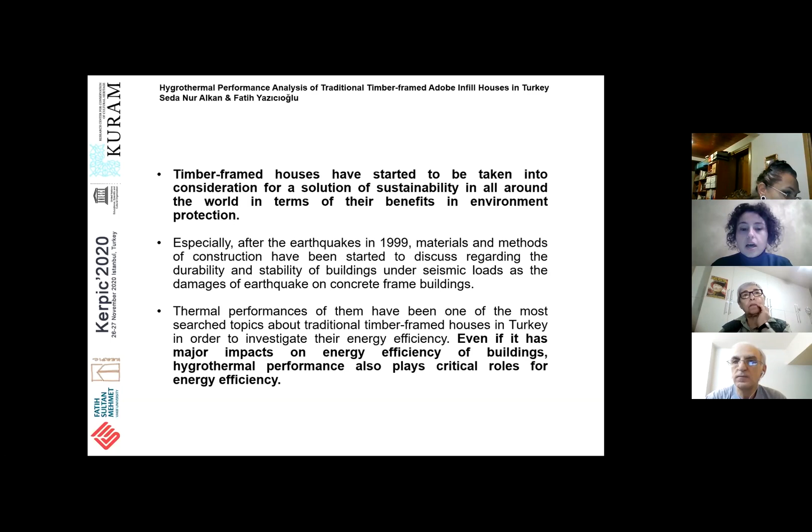There are also some thermal performance research studies about traditional timber framed houses in Turkey to investigate their energy efficiency. However, to understand the energy efficiency of this building, it's not enough to just analyze the thermal performance. Besides the thermal performance, the hygrothermal performance has to be considered, because hygrothermal performance analyzes three important criteria as a whole: heat flow, moisture flow, and air flow.

When we look at Adobe as a building material, it has an important role depending on its environmentally friendly and natural based features. For hygrothermal performance criteria, it's an earth-based material that can regulate the temperature and relative humidity inside buildings, expressed as cool in summer and warm in winter throughout history. This situation creates comfort conditions inside buildings.

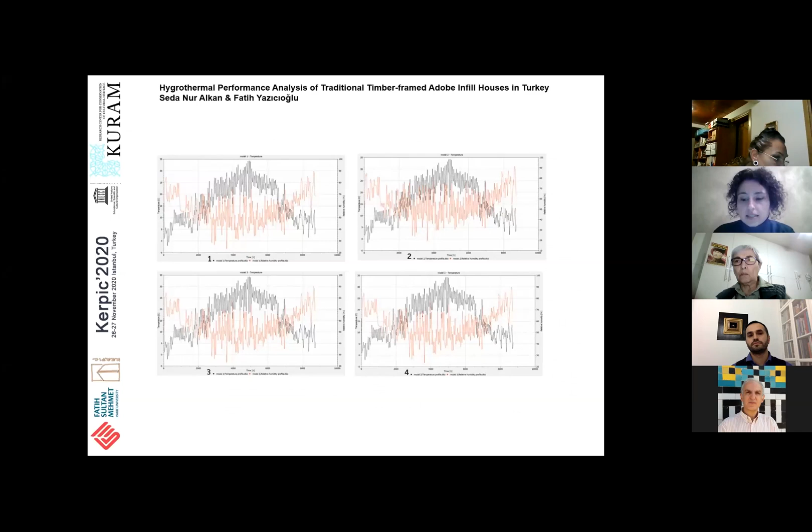Here we see the relative humidity values for four wall types during a whole year. It's automatically stretched by the simulation program to show the whole process as a graphic. In these graphics, we commonly see that the first and third, and the second and fourth, have kind of the same situation.

For the first and third one, this means that in the covering layer inside, which are the plaster layers, we see that there is a huge value difference between the outer surface and the inside part. That means the surface of the plaster layers has become an important problem regarding humidity throughout the years.

For the second and fourth one, we see that the relative humidity differences may occur in the inside part of the walls, especially in the Adobe infill part. This may cause a humidity-based problem in the infill part and also at its intersection point with the wooden studs, so we have the humidity-based problem especially in the middle of the wall system.

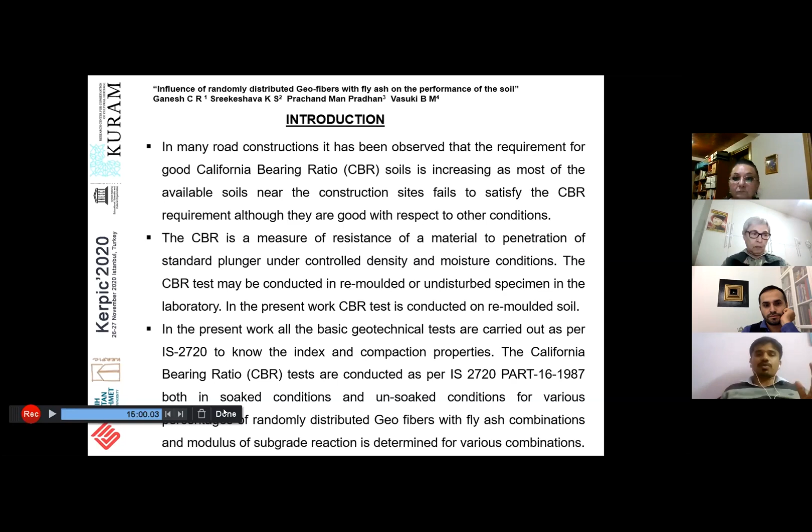After determining the CBR value, by using correlations we have determined the resilient modulus of the soil and modulus of elasticity of the soil. The resilient modulus is an indicative measure of subgrade material stiffness. By using IRC 37-2012, the resilient modulus is determined using two equations.

If the CBR value is found to be less than or equal to 5%, we use the first equation, that is MR equals ten into CBR value. If the observed CBR value is greater than 5%, we use the equation MR equals 17.6 times CBR to the power 0.64.

Once we determine the resilient modulus, using that value we determine the modulus of subgrade reaction using the equation K equals 2.028 into MR. After all this experimentation, we found that the CBR value improved when compared with the unreinforced soil. The materials used in the present work are mainly fly ash.

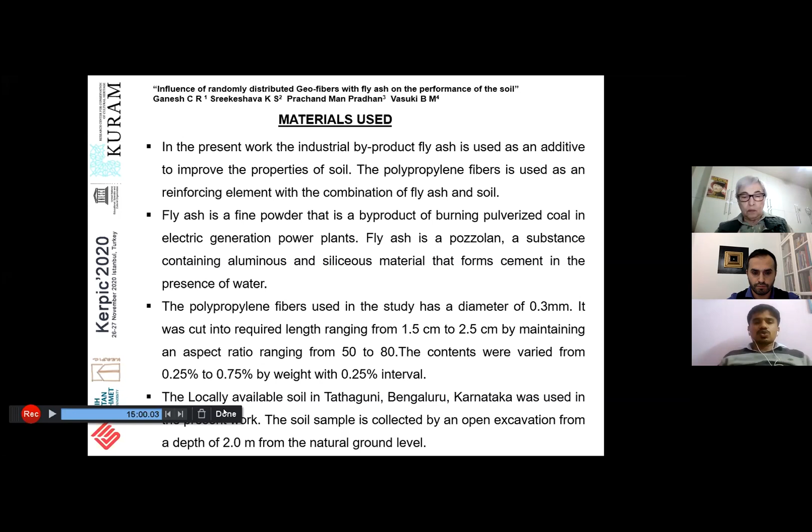When it comes to methodology, what we have done is basic geotechnical tests, all the index properties tests like liquid limit, specific gravity test, and plastic limit test. These tests were conducted in accordance with IS 2720 in order to know the index properties.

Then we conducted compaction tests. We have chosen standard Proctor compaction in accordance with IS 2720 part 7, 1980. The purpose of this test is to know the maximum dry density and optimum moisture content for various combinations.

Then we conducted the CBR test in both reinforced and unreinforced conditions. For reinforced conditions, we considered various combinations. All tests were conducted in accordance with IS 2720 part 16, 1987, in both soaked and unsoaked conditions.

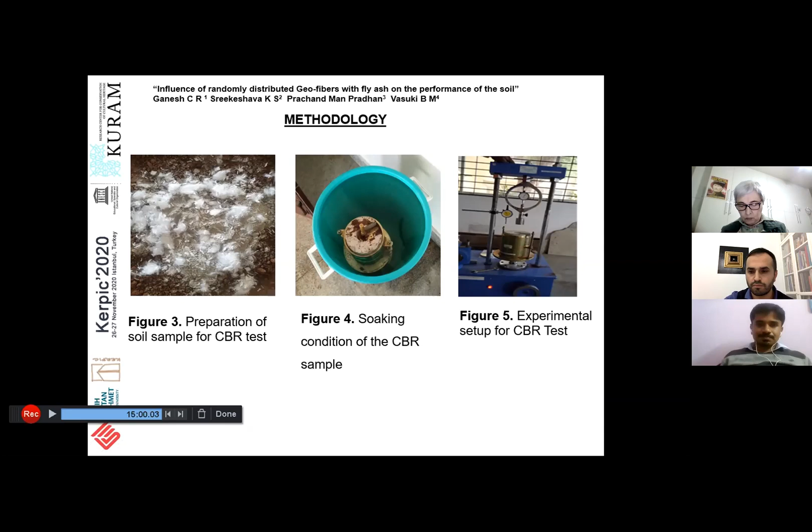The specific gravity of the soil is found to be 2.56. The liquid limit of the soil is found to be 42.14%. The plastic limit is found to be 22.46%. The plasticity index is found to be 19.68%.

Then the compaction results, the OMC and MDD, this is for unreinforced soil, which won't contain any fiber or fly ash. For unreinforced soil, we got an optimum moisture content value of 14.659% and the MDD value as 1.862 grams per cc.

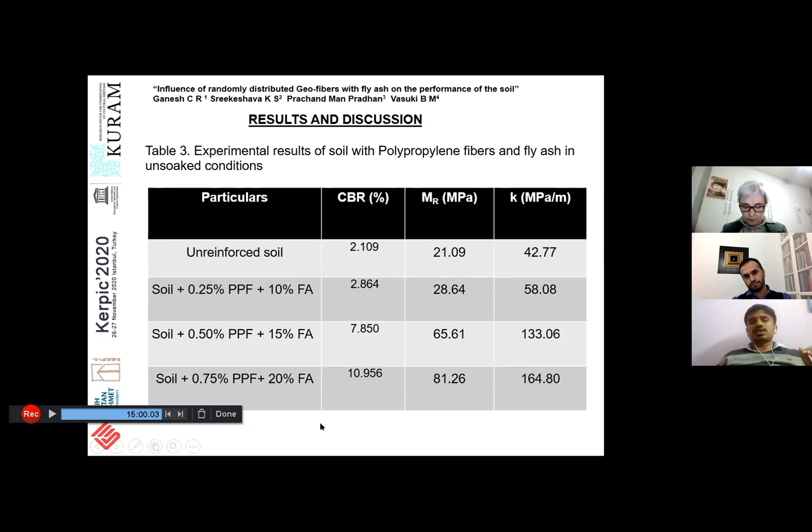These are the results for unsoaked conditions. When it comes to soaked conditions, we found that the CBR value is lesser than the unsoaked condition, but we observed an increase in CBR value for the reinforcement conditions. For the unreinforced soil, we got a CBR value of 3.498%.

For reinforcement condition, the optimum combination for soaked condition is found to be 0.5% of polypropylene fibers along with 15% of fly ash. Here we observed an increase in CBR of almost 1.5 times the unreinforced soil.

Similarly, by using the correlations, we determined the resilient modulus as well as the modulus of subgrade reaction. The modulus of subgrade reaction for the optimum combination is found to be 104.20 megapascal per meter. So these are the results.

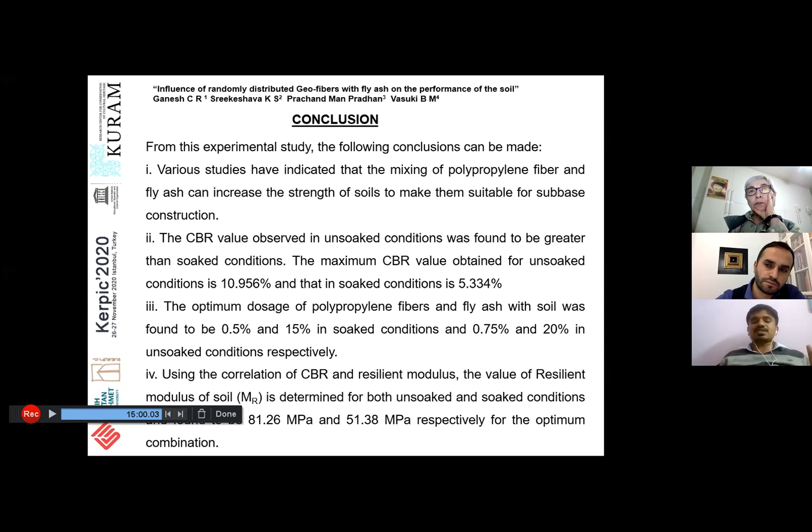The resilient modulus, determined both in unsoaked and soaked conditions, is found to be 81.26 megapascal and 51.38 megapascal respectively. This is for the optimum combinations.

Using the correlations, we have determined the resilient modulus and modulus of subgrade reaction value. The modulus of subgrade reaction for both unsoaked and soaked conditions was found to be 164.80 megapascal per meter and 104.20 megapascal per meter respectively, for optimum combinations.